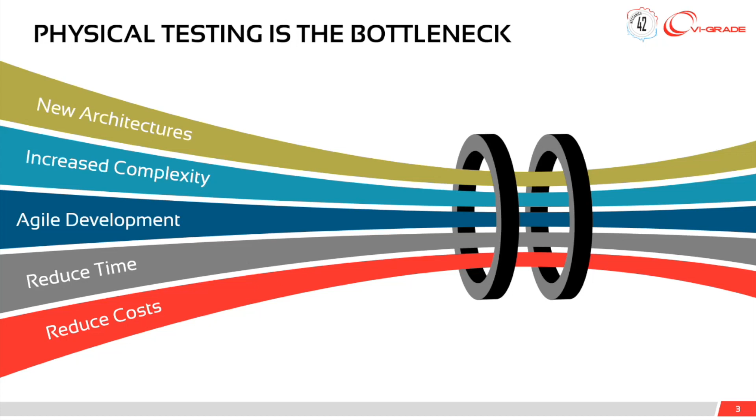So what are the other problems? Physical testing is becoming a bottleneck because of the new architectures, the increase in complexity, and everything we said before. What does it mean? Here are some quotes by our customers. Why is physical testing a bottleneck?

Because it's expensive, because feedback comes too late, the weather dependency. The normal development time is not enough anymore because of short delivery times, and weather is becoming more and more important because there is not enough time to test the vehicles on the road in winter conditions or hot conditions. It is not flexible because modifications are normally expensive. You need physical parts to be modified on the prototypes.

Most of the time it never works the first time, and then there's downtime. It's very important, and time means money. And of course, it's difficult to manage the increasing complexity on multiple prototypes and multiple vehicles at the same time, in parallel.

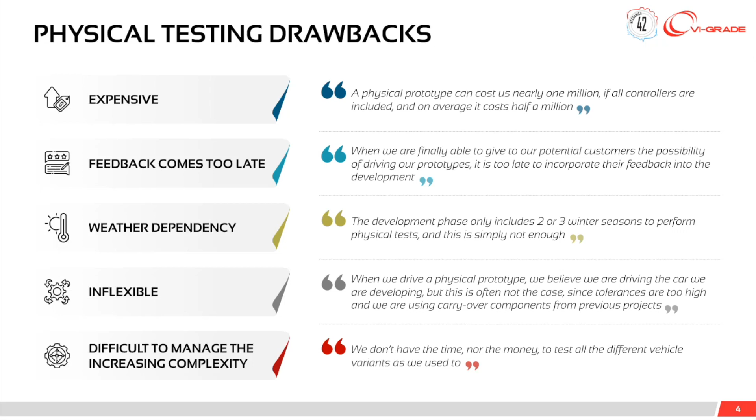But having said that, we still need to remember that everything is about the driving experience, and everything is about people. It's the driver, at the end, who decides to buy or not to buy a vehicle. That's why it's important to define and validate targets for driving experience from the early beginnings, to assess the driving experience throughout the development process, and to develop a car that will be accepted and appreciated by customers early in advance, with the possibility to have clinic events to evaluate a vehicle even before building a prototype, and then direct the development in the right direction.

So to do that, what can VI-grade offer? What is important is to use the right simulator, one that is scalable, because VI-grade offers everything from desktop simulators to large dynamic simulators, going through static, NVH, and full spectrum simulators. It needs to be multi-attribute nowadays, because, as I said before, NVH is becoming a very important part of development and needs to be integrated into a driving simulator to also assess vehicle dynamics. And it needs to have a wide performance range to cover the entire frequency spectrum.

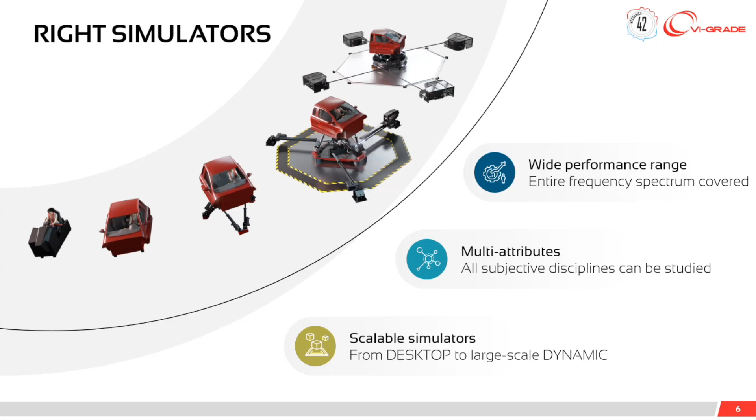The right simulator, but also the right models. Right models means that from the beginning of the project to the end, with the evolving complexity of the digital models and the introduction of physical components when they are available, it's possible to use exactly the same simulation platform stack, the same instruments, the same devices, and just interchange digital and hardware parts when needed and possible. So the right level of detail, the right mix of model, software, and hardware in the loop, and of course, progressive improvements. So Claudio, what does really real time mean?

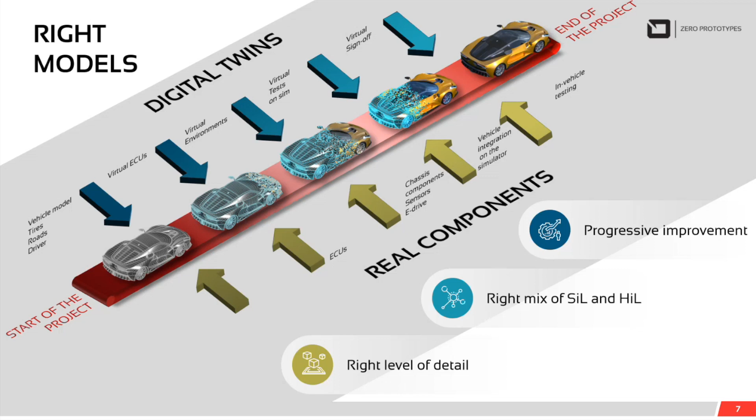Yes, Alessandro, a real-time system is something that can react to external excitations fast enough to influence its environment with correct information at the right time. Having this capability, a real-time system allows a marriage between the physical world and the digital one. So with the XiL approach, the everything-in-the-loop approach, we can think about testing augmentation in which the vehicle model becomes the pinpoint of the whole development process, from the concept up to sign-off.

Having the same language across all the departments of the company, and this language is the vehicle model, communication becomes very clear and lean, and we can focus on the interaction between the different components. Even integrating a complex vehicle function becomes easier, because everyone can focus on the single components and have a clear interface with the others.

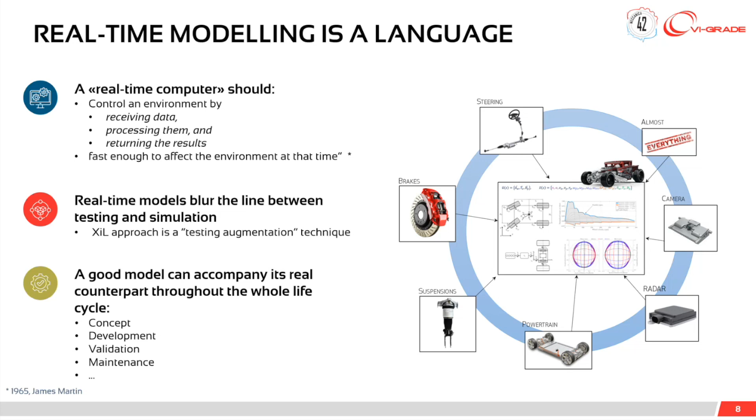Everybody knows the typical V cycle. In the V cycle, you know that you have to focus on vehicle level definition, system level definition, and then component level validation. And this is a very long journey up to the sign-off because it requires a lot of effort in developing functions and so on.

The digital world and the mixture between the digital and the physical world allows to shrink together the two branches of the V. And so someone calls it bridging the gap between testing and simulation, but probably it is more than closing the gap, because the real-time models of the vehicle and the real-time models of every subcomponent can be a proxy of the physical things in any phase of the development process.

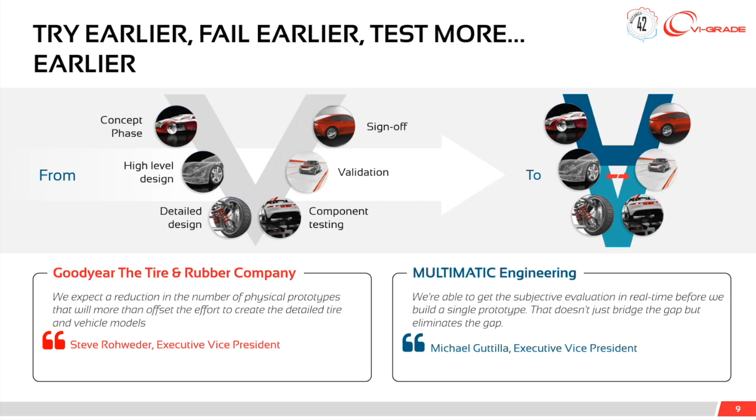But what are the tools that VI-grade put in place for this process? Alessandro.

Thank you, Claudio. So at VI-grade, we elaborate a simulation platform. What does it mean, simulation platform? We define, in order to shorten the V cycle, a XiL solution that is called AutoHawk that is able to accompany customers and engineers from early stage of design, concept design, to the final sign-off of the vehicle with exactly the same real-time simulation platform.

We will then cover in the next slide some of the details, but basically the idea is to follow all the steps of the V cycle from the desktop simulator with offline simulation and model preparation, in lab simulation with software and hardware in the loop, never forgetting the model in the loop when hardware and software of the ECUs are not available, on sim together with driving simulators. The on-vehicle solution is also able to run real-time or even faster than real-time vehicle models inside the vehicle on the road prototypes, and then the full digital twin.

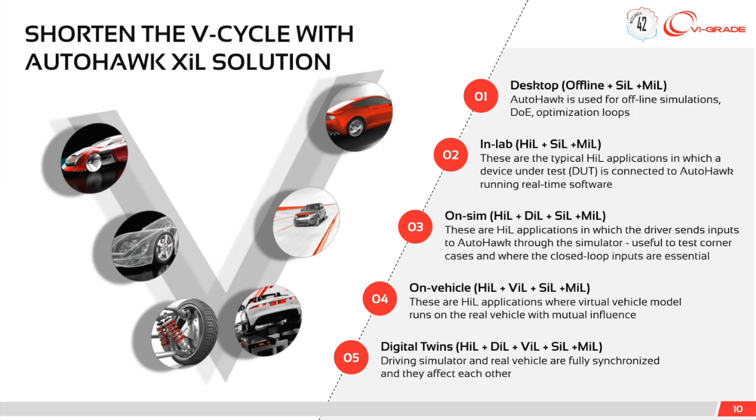We define three main application areas. The first one is the chassis. The chassis, for a vehicle dynamics engineer, is the bread and butter, the main focus since many years. But all these areas are, of course, interconnected with each other. When we talk about chassis, we talk about steering, dampers, suspension systems, active or semi-active suspensions, brakes, with also steering and brakes that could be by-wire systems. Then all the controllers and active aero.

Then we have the group of ADAS, autonomous vehicles, and the UX/UI that we cover under the same umbrella. Means all the sensors like LiDAR, camera, radar, vehicle in the loop, vehicle-to-X, and of course all the HMI and the user interface in the vehicle.

And then the powertrain and driveline area, where no matter what the type of powertrain is, it can be internal combustion engine, hybrid, fully electric with battery electric vehicles, or even fuel cell electric vehicles. All these are covered by the powertrain and driveline area.

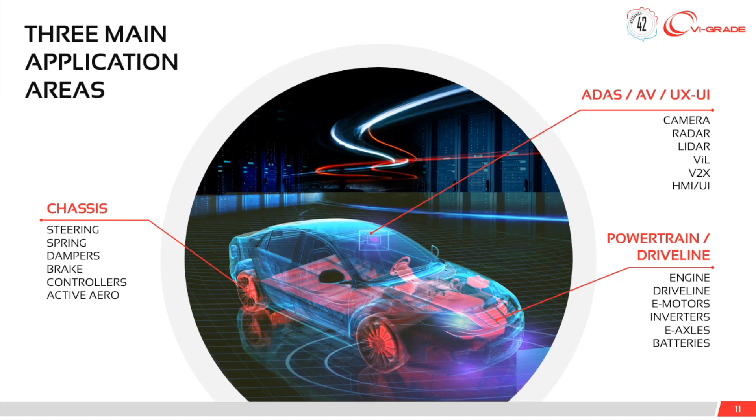What we do in order to cover the real-time simulation, we define a standard platform in order to run real-time simulation and real-time vehicle models on it. We define a bunch of standard configurations that cover the majority of use cases. We started with an 8-core system for the desktop simulator. Then we moved to 16 and 24 systems that can equip a very complex hardware-in-the-loop system or a driving simulator. And this year we launched the new AutoHawk 24 with upgraded performance on the CPU.

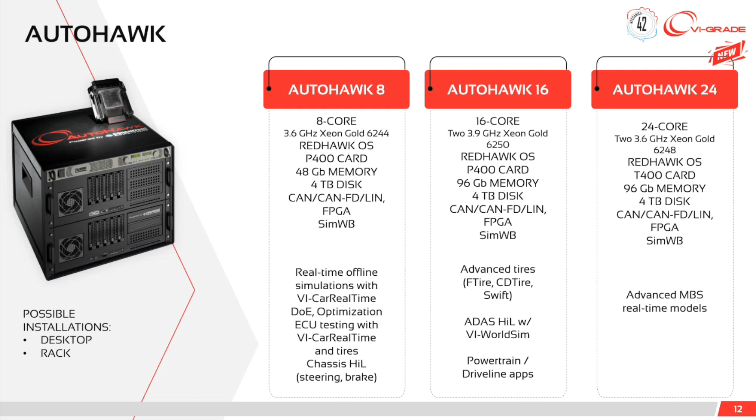And I'm also glad to announce that we launched brand new products for 32 and 64 core machines, with very new CPUs able also to assign a specific task to each core of the CPU. And what is also important is that these specific AutoHawks are designed to run multi-body models, for example SIMPACK or Adams Real Time, and still able to run complex driving simulators. And then, of course, on a case-by-case basis, we also have the possibility to build a fully customized solution.

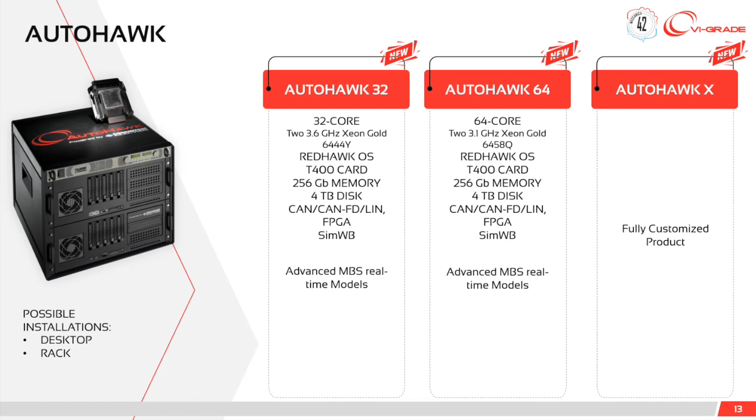Another novelty we have launched this year is the AutoHawk On Board, with the same computational power of an AutoHawk that can be used on a rack or a desktop simulator. We can also fit it within a car with, of course, a much smaller and slimmer form factor, with a nice carbon fiber cover, and it is a rack solution with a 12-core system and a Xeon Gold CPU.

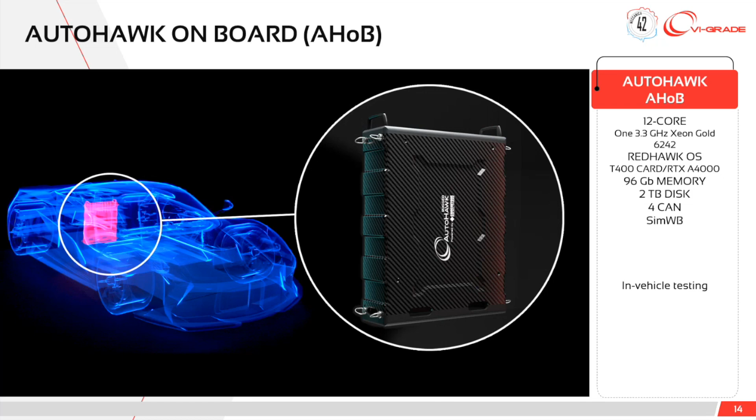What is the ecosystem? We talk about the platform, simulation platform. And what we call simulation platform means an ecosystem, open ecosystem, where we can run both VI-grade products in terms of simulation software, but also third-party software, starting from vehicle models. Of course, we can run VI-CarRealTime, but also we can run, as I said before, multi-body models, but also simplified models like Dymola, IPG CarMaker, tire models, very important.

This is becoming more and more important to test different tires before selecting and building the first prototype. And thanks to the multi-core technology, we can also launch a specific tire model on each wheel in real time. Different scenarios, driver models, sensors. We can link the AutoHawk system to external third-party controllers.

Customers can have different systems for linking ECUs and traditional hardware-in-the-loop systems with NI, dSPACE, Vector, and then we directly link in real time to those systems. And sound, force feedback, telemetry, biotelemetry, motion cueing with different platforms, and all runs in real time on the AutoHawk system.

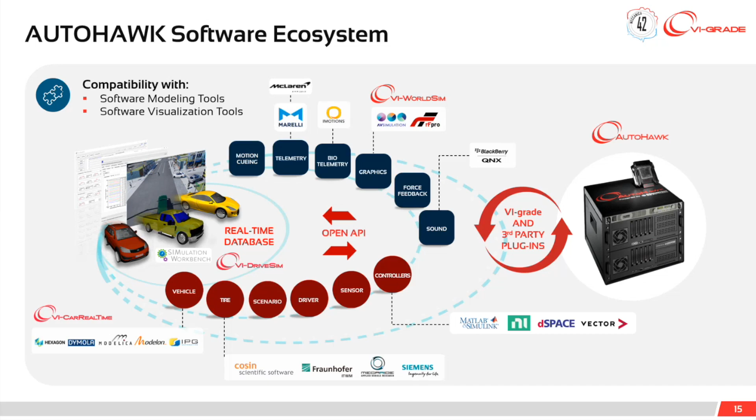Let's say, in a more precise way, what does it mean, AutoHawk and a simulation platform? The platform is formed by hardware, with the specification I listed before, with the real-time machine, of course. Then we can have a signal conditioning module, fault insertion modules when we build a rack, with all the I/O boards, programmable FPGA, for example, and then all connections.

Then we have the simulation workbench layer that allows us to define which are the tasks and also to create the network of inputs and outputs to link with the ECUs or mechanical components, or simply linking and running real-time Simulink models on it. And then we have the DriveSim stack of software with VI-grade proprietary systems, but also the possibility to link, as I said before, with external FMI, FMU, and OpenAPI systems to third-party software.

This, of course, comes with a testing automation that, case by case, we can build, that helps to link the device under test for a mechanical hardware-in-the-loop system, and of course with the real vehicle when we talk about onboard systems, and with the driving simulators.

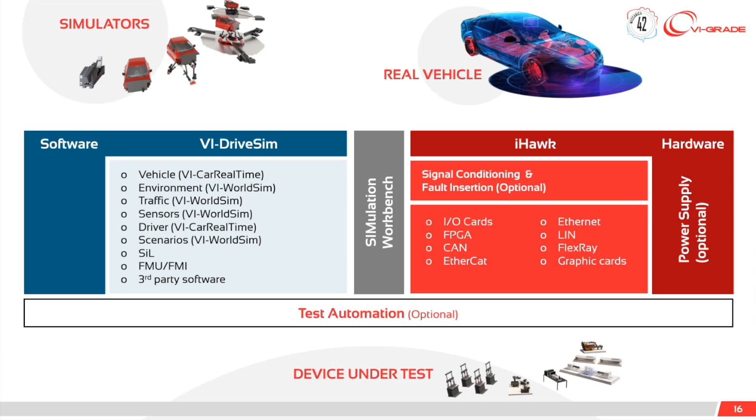Please, Claudio, can you show us what are the use cases? Sorry, Claudio, you're on mute. Sorry. So thank you, Alessandro.

Everything typically starts from the model in the loop. So typically, we don't have yet a prototype of the system, and we have to start discussing about the things that need to be installed in our vehicle. Here, there is a short example of a model-in-the-loop approach in which we are in the very first phases of the development of a steering assembly, and we have to decide which are the targets for this steering assembly.

So everything starts with a mathematical description. We start building up a mathematical model of the components, try to find the best compromise between the complexity of the model and the reliability of it. If it is not the first model of the steering system that we have to discuss, we can also compare the results of our model with some previous experience in the real world, and then we can start playing with the parameters and try to figure out what is the best for our model. You see here that everything is very flexible because we have just a mathematical description and we can play with the numbers.

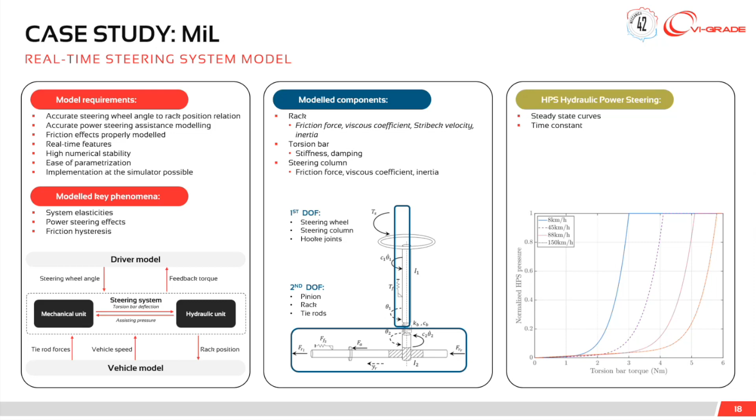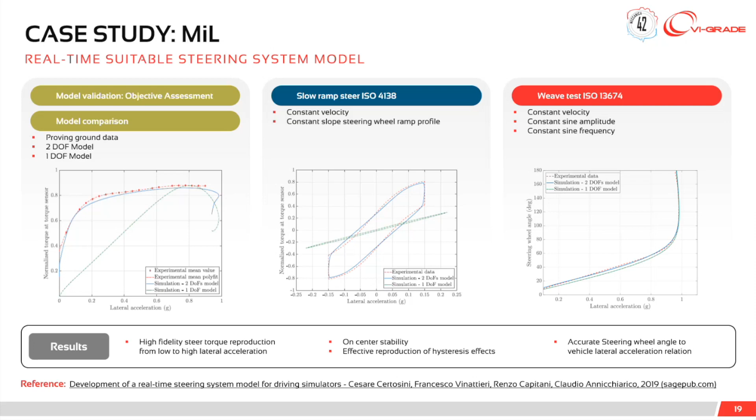So the methodology of the test will be the same during the whole test, and we just change the parameters, and this procedure will remain the same always, even later when things become real. So we can compare different tunings, and we can compare different mathematical models. After the comparison, we can even put the driver into the loop, and so keep together both the objective assessment and the subjective assessment. And this is the key point.

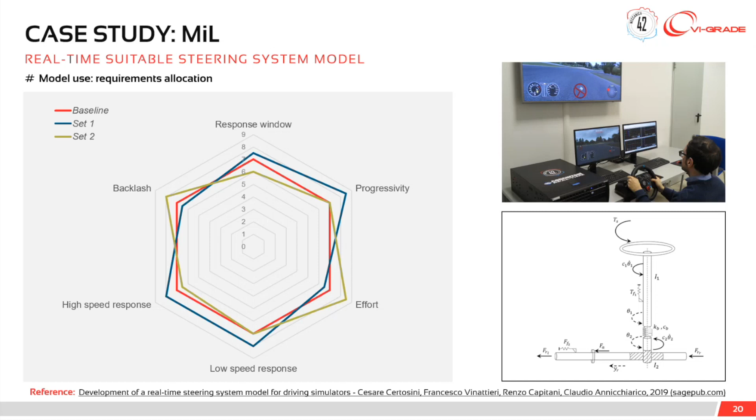So we have a real-time model that is capable of running in a driver-in-the-loop scenario, which can be a simple one, like the one that we are seeing now in a desktop environment, or a more complex one, like the dynamic simulator. And then you can link together objective and subjective evaluation and select the proper data set to be used on the final output for the target setting activity.

Then the next step is introducing something real into the game. And typically the first step into the real world is to put the software. So the software that controls our mechatronic system, but the software that has to be compiled as it will be in the real ECU. So this is an example of usage of an AutoHiL, so a real-time machine with a vehicle model running in it, and again, a driver-in-the-loop approach.

Here we can put a development board inside the same loop and write down, compile the software, the final software in this development board. Then the output of the development board will be in control of a model in the loop again. The model in the loop will be the mathematical description of the brake actuation system and of the brake foundation. In this way, there are a lot of things that can be checked.

For example, the very basic one could be to verify if any bugs are in the software, or more than this, we can evaluate the reliability of the software and check if there are some faults. The test can be done with the driver in the loop or in an automated way. So we can open the way to functional assessment, reliability assessment, functional safety, and even the safety of the intended functionality.

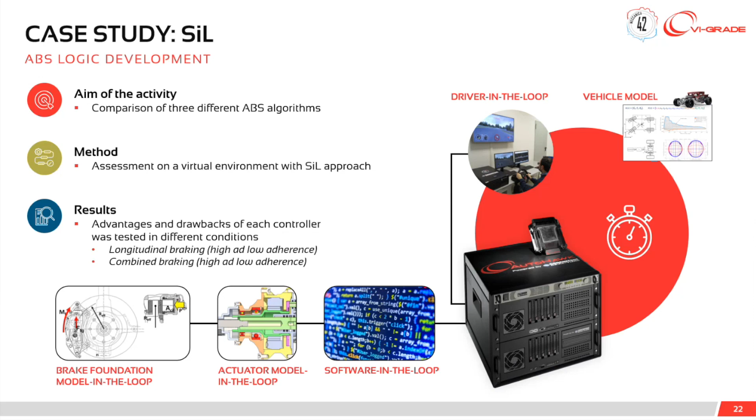Focusing, for example, on an ABS logic, here you can see the difference between different tunings, and this is done just in the laboratory with a desktop simulator, trying to follow a basic straight line or mu-split braking maneuver, and integrating all the parts of the software as a software-in-the-loop approach. Comparing the results, you can have a great advantage in then implementing the system with a more physical approach.

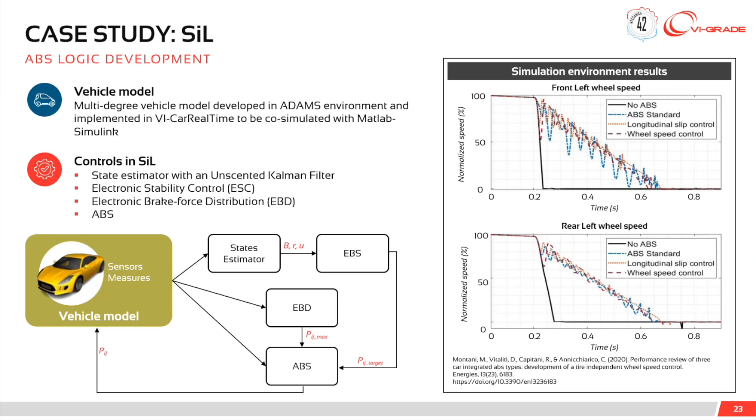And what do I mean by the more physical approach? A more physical approach for me means starting to play with the real hardware. So when we talk about HiL, we think about not only the ECU, but even the mechatronic hardware.

This is an example of, sorry for the volume. This is an example.

Probably some of you already saw these components. It is a steering test bench and a full architecture of steering, braking, and so on in the same loop. And you can see here that the vehicle is testing in a virtual scenario all the real functionalities that are embedded into the vehicle components. Here the driver is testing lane keeping, lane centering, and so on, and all the activities related to fault injection, usability of the system, control of HMI, and so on can be easily assessed here.

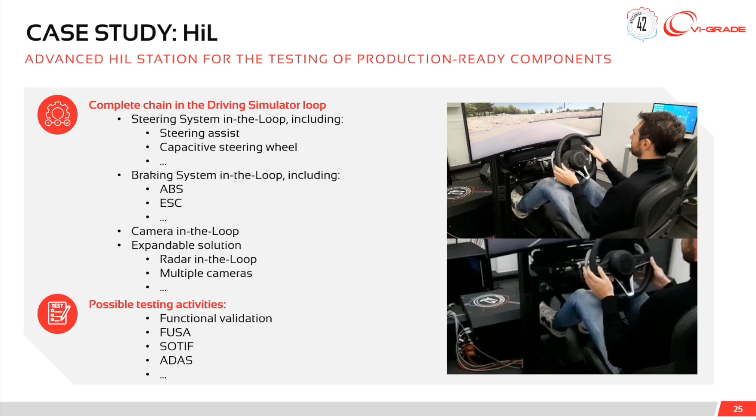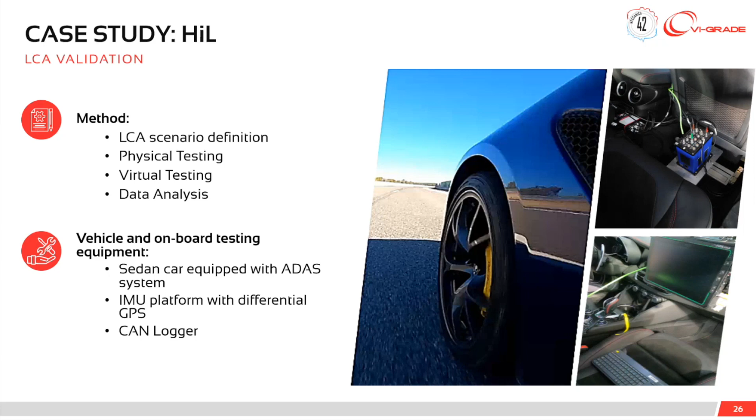This is an example of it. So consider that you have a real vehicle and you want to verify if your HiL system is suitable to properly assess the performance of the system from any point of view, from the performance side up to the reliability side. So you can take this vehicle, start logging some data on it, and start testing a particular feature. Here we will focus on the lane centering assist system, the one that keeps the car in the center of the lane.

The approach is this one. We take the physical vehicle, we perform the test in a closed circuit, a long straight circuit, and then we repeat the same maneuver in the HiL environment with the same road 3D scanned.

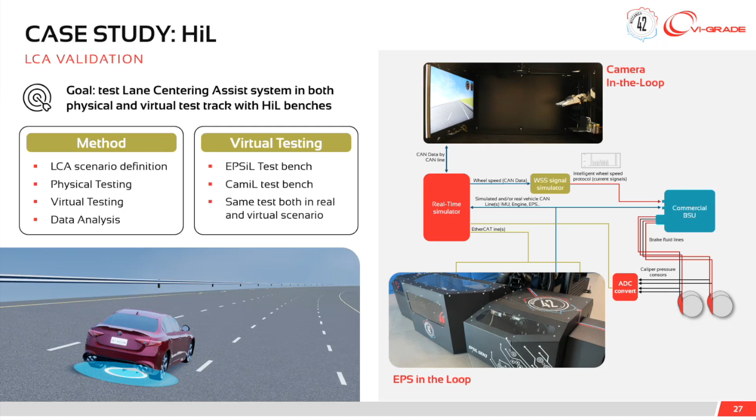The HiL setup includes the real EPS in the loop, and the EPS is exchanging both electronic quantities with the virtual vehicle and physical quantities, because both ends of the steering gear are excited with the road forces. Then we have the brake system introduced into the HiL system, and also the camera. So the same ADAS camera that is installed next to the windshield is put, as you can see in the picture in this slide, in front of a monitor just to make measurements on the lanes and possible obstacles.

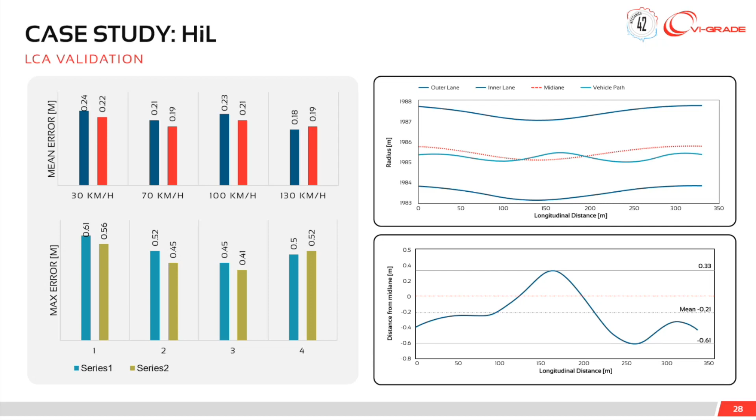And so you can understand how efficient it is to validate the system in a virtual environment using real hardware in that way. For example, typical usages of this HiL system are to inject some faults. These faults can be injected in a software way or in an electric way, for example, putting some pins of the connectors in short circuit. In that way, you can also evaluate the controllability of the vehicle and check some cross-domain fallback systems, for example, using the brakes to help during a difficult maneuver.

Then you can use it also for calibration. Here we are focusing on the EPS, but it is not the only case. It can be any kind of hardware that you can imagine, for example, dampers, semi-active dampers; the approach is almost the same.

And then things become more and more interesting when the function that you are testing is done by the interaction of different vehicle components, for example, ADAS development with the steering wheel. So the driver in the loop can take the steering wheel in his hands and directly drive the steering gear. That is the most immersive solution and can be used also in a very, very small environment like laboratories.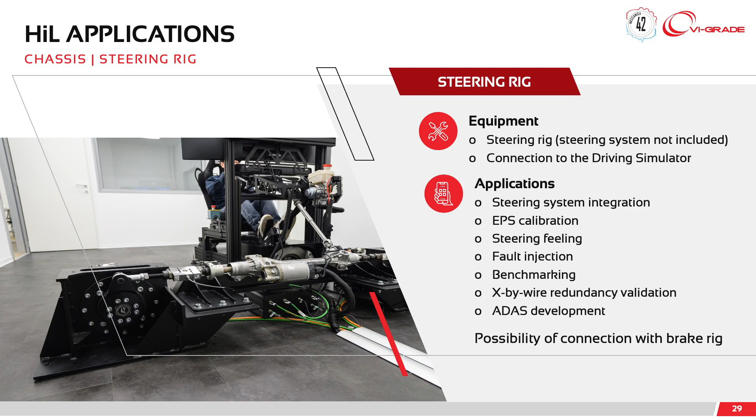The other approach is the one that you can see in this video, in which the steering gear is directly moved by a torque actuator, so a motor, which is acting like a virtual column. So the steering column is directly coupled to a motor, and then the driver drives a feedback unit by remote. And both feedback actuator and torque actuator are in the same control loop in order to provide the driver with the correct feedback on the steering wheel and the road actuator with the correct torque on the steering column.

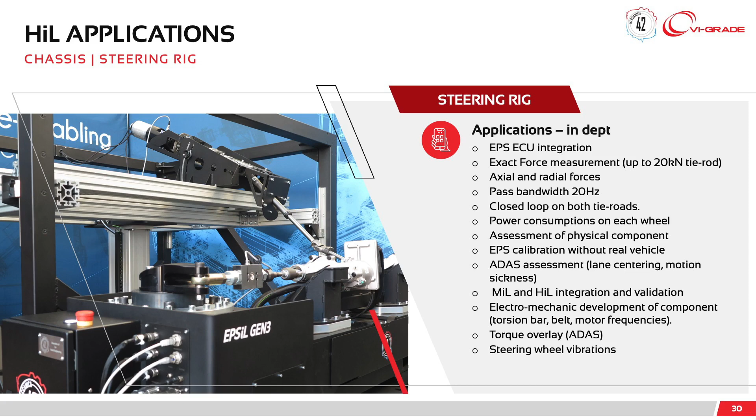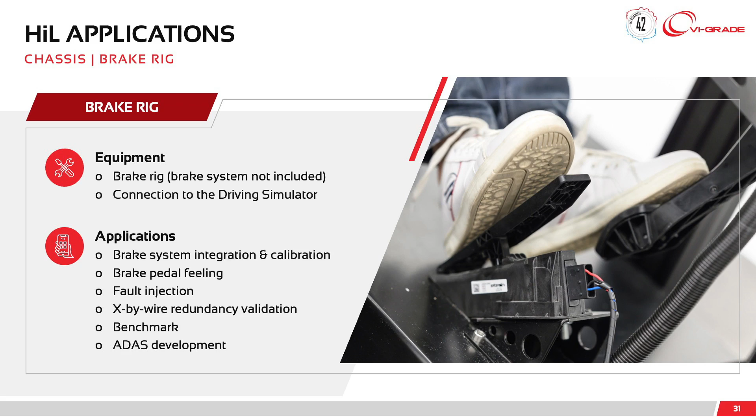The same approach is used, for example, on brakes. Also, the brakes can be installed in a hardware-in-the-loop scenario. So, leveraging a virtual model of the vehicle, we can test all the functions that are leveraging the brakes using the full brake system and the real brake actuator, no matter what kind of actuation system you have, if it is a brake-by-wire system or a traditional ABS system.

Even in this case, the brake rig, which includes all the brake foundation, starting from the calipers to the discs, the pads, the pipes, and so on, can be driven directly connected to the driver's interface or by remote. And here we can link the feedback on the pedal feel, which is an electrohydraulic actuator put in the cockpit of, for example, a dynamic driving simulator, and then having on the floor a test bench in which all the brake foundation is installed together with the brake unit.

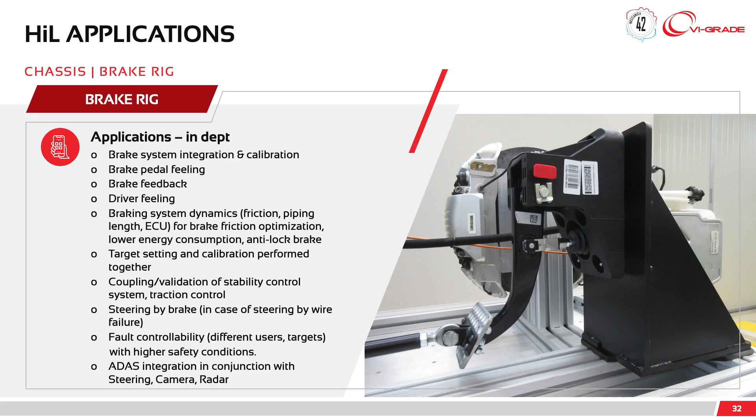In this way, for example, a proper tuning of the calibration of the pedal feel can be easier, because you can directly change the reaction on the pedal feel in a very easy way, just acting on the software, and then taking back the results for setting up the targets on the hardware side.

So, as I was explaining, the most important part of the hardware-in-the-loop side is having access not only to the interaction of the driver with the driving simulator, so not only including the driver in the loop of the simulation, but also including the hardware, and so opening the way to real testing on real components. And as I was explaining before, you can put on the floor a test bench and a driver on a dynamic platform. And this can also be done when the distance becomes greater, thanks to AI-based prediction techniques. And now there is a short video of how this works.

Alessandro. Thank you, Claudio.

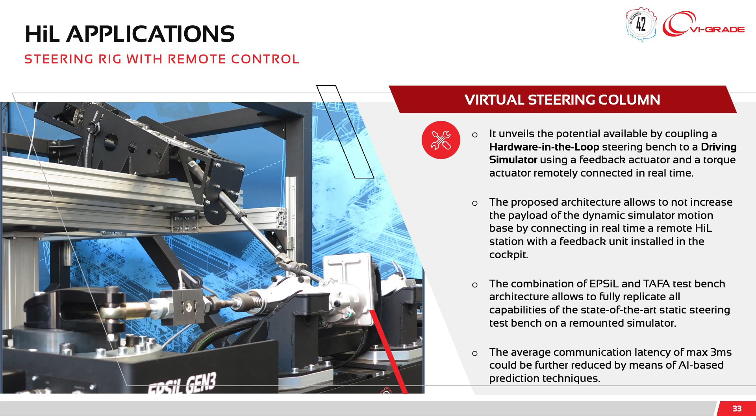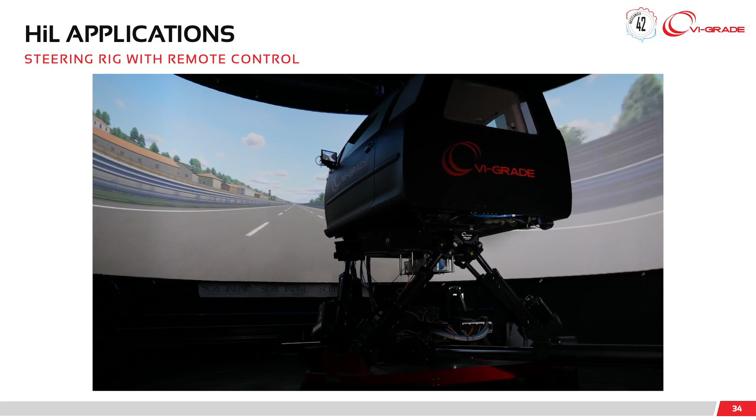Yeah, so here we can see a dynamic driving simulator, the DiM150, remotely linked to a hardware-in-the-loop steering rig from Meccanica 42. The maneuvers performed by a human driver on the simulator that you will see include steering on-centre feeling with small angles and the linear tire response, slalom on cones, testing balance and agility, and double lane change, evaluating maneuverability and stability.

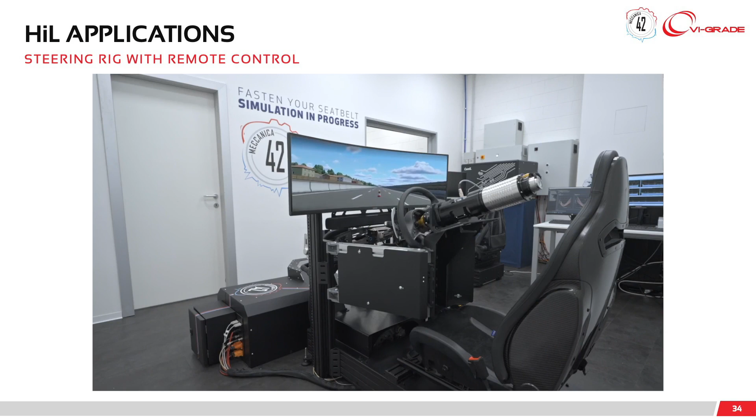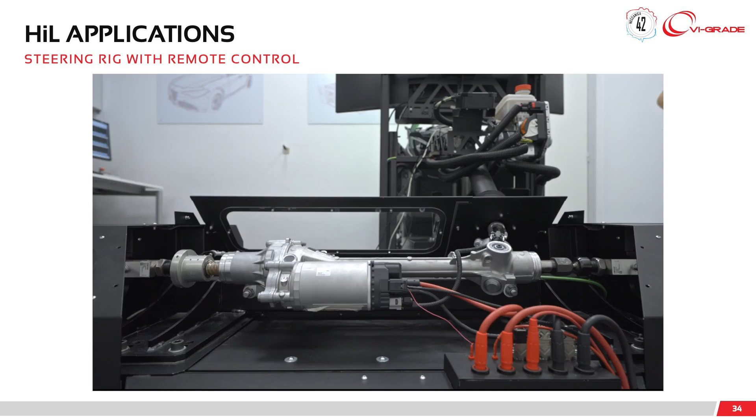As you can see, the steering is remotely connected, and the steering movements made on the simulator are transmitted to the HiL rig, allowing us to investigate the steering system reaction in real time. As you can see here, you have the steering rack, and these are in closed-loop connection between the two systems.

So, to go to conclusions. As you can see, having a hardware in the loop, or in a wider range an X-in-the-loop, reaching in the end a comprehensive mechanical hardware in the loop with the real components, leads to having human feedback earlier. That means, in the end, with the real numbers, increased innovation. For example, we have a customer that reached new records on the Nürburgring, preparing that record early in advance when the prototype was still not available, or building the prototype with all the results coming from simulation.

Shorter development. Some customers, Volvo for example, basically cut by half the development time for a specific vehicle, or reduce, as we said before, the physical prototypes. NIO, for example, reduced prototype production by 40% thanks to the driving simulator and the simulation approach.

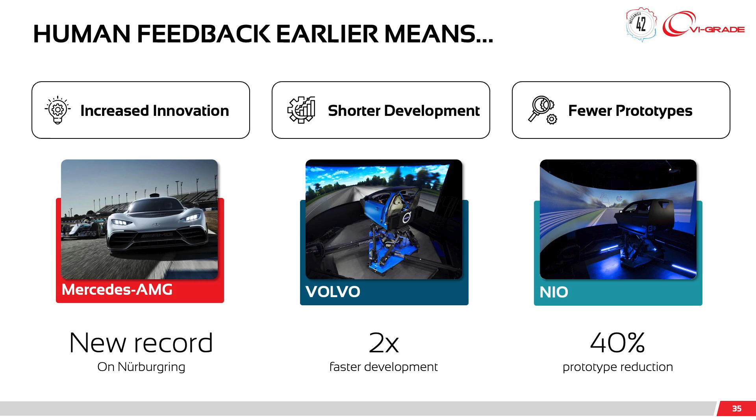Conclusions. As we said in this presentation, hardware-in-the-loop applications complement offline and driving simulator activities that help a lot with virtual sign-off. Complex use cases can be simulated and tested with driver-in-the-loop and hardware-in-the-loop systems without involving physical testing with physical vehicles, but still involving physical components early in advance, testing in very dangerous conditions and simulating many different driving environments.

And the Linux-based open architecture of the platform, based on Concurrent real-time technology, enables the integration of custom solutions as well as third-party products, thanks to the openness of our platform. And in the end it represents a complete and open solution made of hardware, software, and integration services as well. So now we are ready for Q&A.